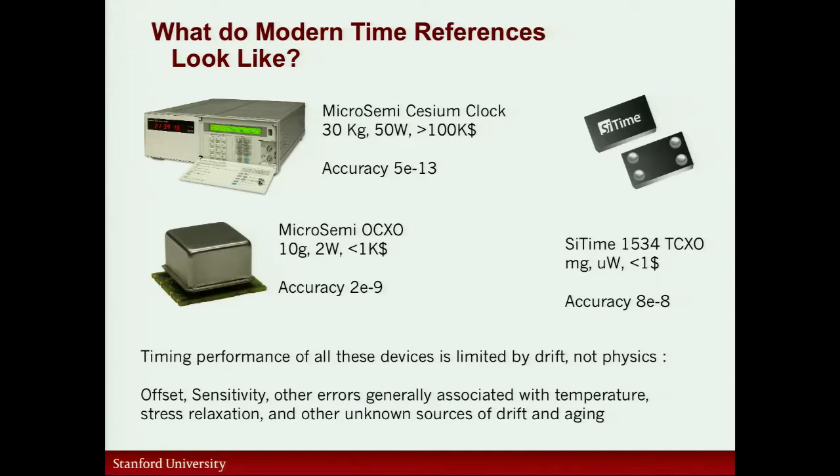And then more recently, silicon micromechanical oscillators have come up, and we'll hear a bit more about that later today. But SiTime has a product that weighs milligrams, consumes microwatts, costs less than $1, and can get down close to 10 minus 7 in terms of long-term stability. And like I say, I'll let them quote the details on that.

Clark wrote a paper about a decade ago that sort of outlines the challenge and the opportunity that is presented here, that there's potential for micromechanical oscillators to perhaps reach stabilities down to the 10 to the minus 9 range and provide low cost, low power, and other opportunities. But aging rates will probably not match those of atomic clocks, just based on what we think is true for MEMS.

At the same time, atomic clocks are too big and too expensive, and unless they come down and become portable and accessible to sort of things that we might carry around with us, there's always going to be this gap between the performance of one and the other, and we really have incredible needs right in between.

So can we improve this? Of course, there's been effort on the chip-scale atomic clock program. The current version of this that I could find on the web is 100 grams, 300 milliwatts, I'm guessing around $1,000, and has long-term stability over temperature that's better than 10 to the minus 9, but not a whole lot better.

And I'll say a little bit later today about what could be an in-chip OCXO technology for MEMS that is approaching some of these parameters, but is a fair bit smaller and could be a lot less expensive. So that'll be sort of the frame for the timing part of this talk.

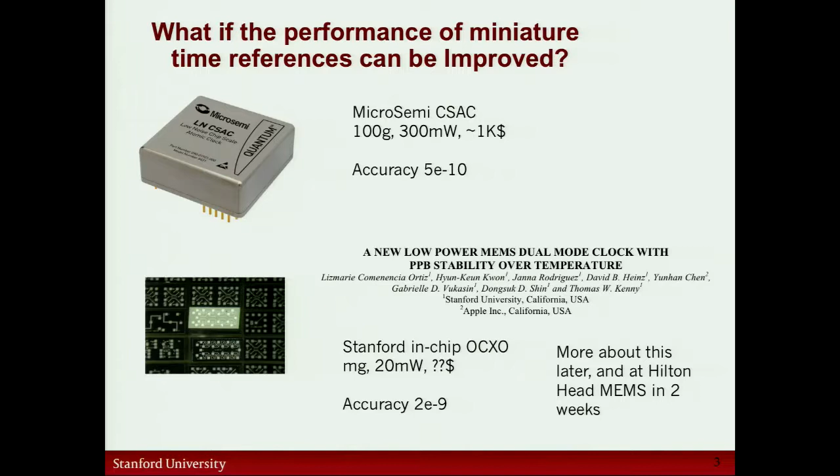And I think true for both timing and for inertial navigation, the issues that limit the low cost, low performance things are not physics. It's not Boltzmann's constant and temperature and things like that. It really comes down to more practical things, packaging, temperature, stress relaxation. And I think what's interesting is that it's the same pile of issues that affect both of these communities. And that's why I think it's interesting to look at the lessons being learned in parallel.

If we could make better inertial sensors and have them still be portable and low cost, it opens up a whole lot of applications that are currently inaccessible. We'd like to do a much better job of personal navigation. There could be better use of these systems in autonomous vehicles and in safety systems. There's a lot of interest in virtual reality, but that also could be much better. This could lead to improvements in surgery.

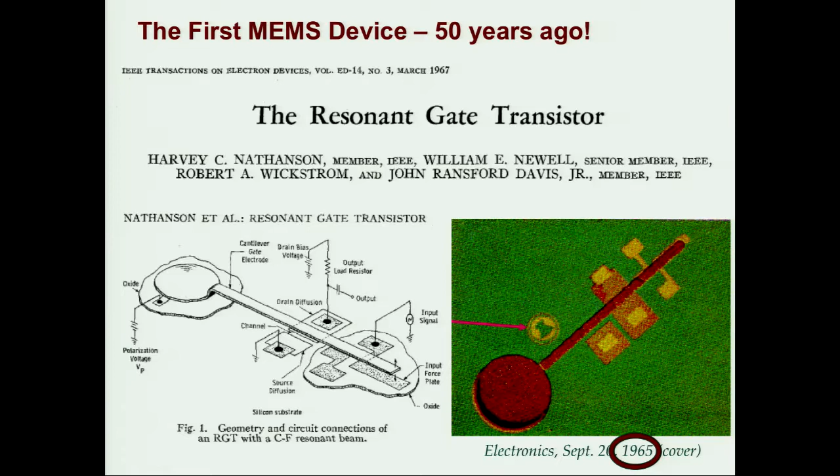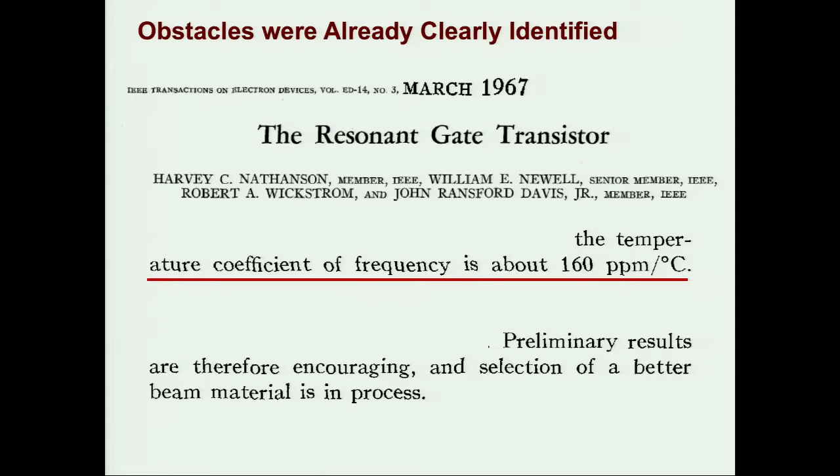The oscillation of the beam in the vertical axis was detectable by looking at the properties of the transistor positioned right underneath it. It had a lot of issues, but it was actually pretty promising in its early stage. Its characteristics over temperature were dominated by the mechanical characteristics of the gold beam, which were terrible. But nevertheless, somewhat encouraging even back then.

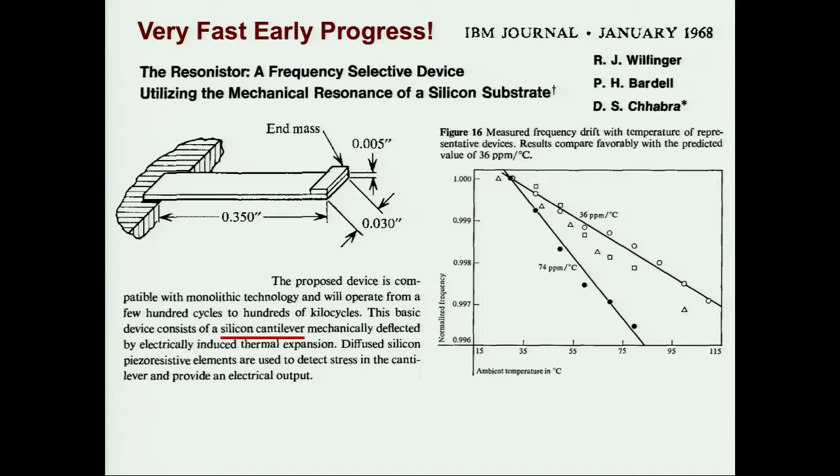Very quickly, there was work on making beams out of silicon. This is now 50 years old. And right away, you could see that the basic performance of the device was significantly improved. The temperature coefficient of the mechanical properties of the silicon was much better than that of the gold. And this was considered a very... which, again, 50 years ago, I think set the stage for what then became a very long, painful development process within our community to try to solve the problems that would fix both what you see here, the strong temperature dependence of frequency, and all of the issues with uncertainty and drift.

This work went on for many, many years in the MEMS community. There were studies by researchers all over the world on micromechanical devices, mostly cantilever beam resonators, exploring things that would affect the resonant frequency of that device. There was interest from the start in detecting single atom or single molecule absorption on these cantilevers as a way of making sensors. And in order for that application to be useful, the resonator had to be stable enough that the frequency shift from a single molecule was detectable above the background drift of the resonant frequency.

So there was a lot of interest in this. People built a lot of devices and turned them on and let them run for a long time. And the general legend in the MEMS community was that, try as we might, there seemed to be some inherent aging problems with the technologies that we were playing with, that the materials were relaxing or creeping. There were other kinds of aging phenomena happening.

And even as we got better at building devices and building packaging, we still consistently had this problem that the resonant frequency of standard micromechanical elements, even when packaged to the best that we could package at that time and protected from the environment, we still saw drift in the dynamic properties on the order of parts per million per month. And of course, anything that's drifting at the level of parts per million per month is pretty much useless in this community. That's a non-starter.

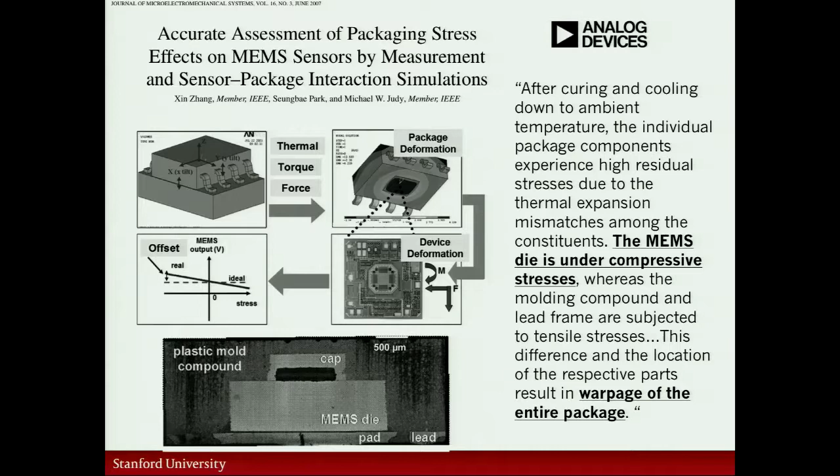And in addition to just stressing the die, they will warp the die, twist it and flex it in ways that are really sort of detrimental to the performance. So they did a lot with simulation in this approach. They played around with the design of the resonator. In this case, it's a gyroscope, but it's basically a resonator. Played around with certain aspects of the material selection. We're able to improve the situation by about a factor of 10 or more.

If you're going to be attached to a warped substrate, your best hope for eliminating that problem is to limit the range of that substrate that you're attached to the smallest possible footprint. And that's a lesson that we've learned for other applications, and I think it's interesting that it shows up as one of the dominant outcomes of this work.

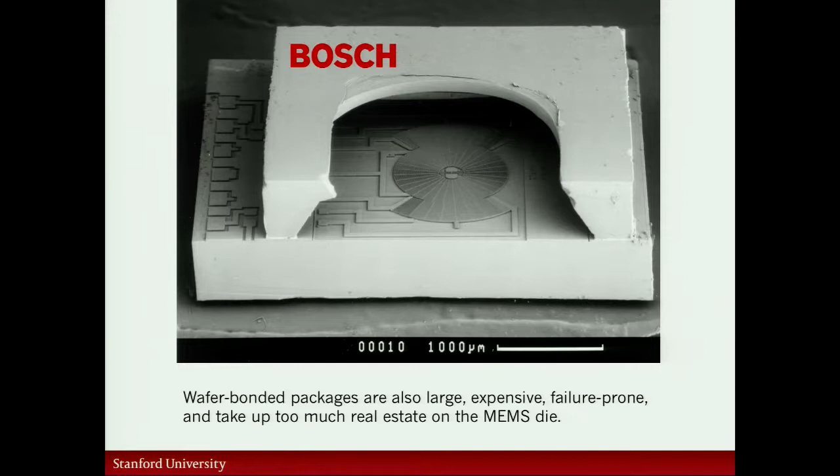But the objective of this wasn't anything beyond just trying to minimize the footprint. Get rid of all of this wasted real estate around the micromechanical element that's important and try to make the entire die smaller. It was really just about putting more die on a wafer, reducing cost, and perhaps improving some of the other reliability issues. This led to some research. Aaron Partridge was a PhD student in the group at the time.

It led to building, instead of bonded wafer encapsulation, we started growing film encapsulation. So instead of putting a second wafer on top of the first wafer, figuring out how to glue them together, we build up the package by growing layers on top of the silicon wafer based on materials that we had access to. Bosch at the time had developed a process for low-stress, thick polysilicon, the so-called Epi-Poly. We had an Epi reactor in the lab at Stanford, which wasn't designed for this purpose, but could be adapted to do this job. And so we started growing packages by building layers on top of the MEMS technology and seeing what we could do with this.

And we knew right away the goal initially was to make accelerometers, make them small, and not otherwise destroy the performance, and we had some good success with that. But we knew right from the start that anything we built had some stability issues. The resonators that we could build in the same process had this drift that I showed earlier, and it had to do with the sealing process.

We're using a chemical vapor deposition oxide to sort of plug up all the holes in the top layer at the last step of the process. When that's finished, that leaves a lot of organic materials bouncing around inside the package. It leaves some organic residue perhaps on the micromechanical elements. That ages over time. It's problematic. But we did have an early victory in that we were able to make a smaller MEMS technology.

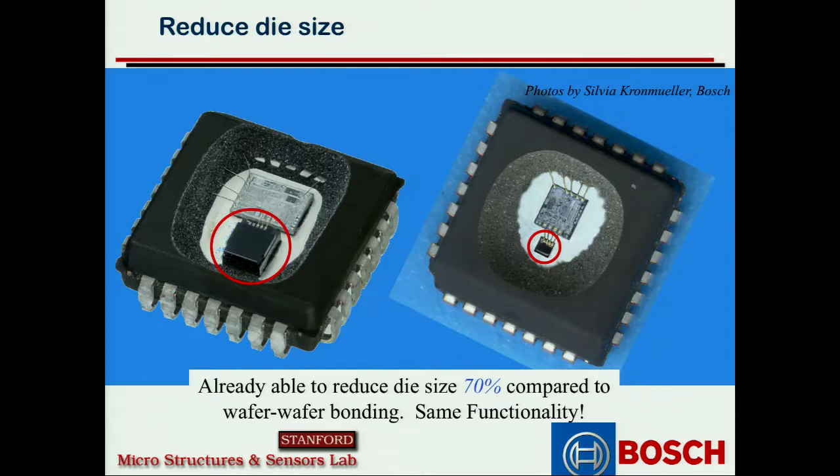Bosch was less interested, sadly. I think, frankly, they had a certain size fab, and they had a certain size customer, and if we put more die on a wafer, it meant less wafers going through the fab, and they'd already paid all the fixed costs of this whole thing, so there was no point in taking this thing on. Plus, it was different and complicated, and they were risk-averse at Bosch.

So we were kind of stuck, looking for what to do with ourselves. Aaron was graduating. Marcus was being told it was time to go back to Germany. We were trying to decide what would be the next step for us. And Clark came out in his time at DARPA with a BAA that actually gave us a new opportunity to rethink what we were doing.

He asked for wafer-level encapsulation strategies, and we had something that sort of looked like that, that could isolate a micromechanical device from the surroundings while maintaining an environment and providing either passive or active control. And the goal of this, way back then, was already thinking about how to make a miniature OCXO, how to develop a technology that could ovenize and isolate a MEMS device from its surroundings.

So we knew right away that our process of sealing these devices with chemical vapor deposition oxide was never going to be good enough for the metrics of that program. So we started looking around, what other things could we use to seal the device with, still preserving this thick film encapsulation process and most of the materials. And by the way, also, wanting to be sure that whatever process we developed would be compatible with established manufacturing processes at Bosch.

We didn't want to invent something that was cool and useless. So the goal was to try to develop something that actually, if we got something right and it was interesting, there's people who would know how to make more of it, and we could go down a faster channel.

So among the things you could deposit, we thought about depositing metals, we thought about depositing other materials, ultra-high vacuum techniques. We already had this Epi-Poly thing that we were using to grow the first half of the cap, so it was kind of obvious to try that as well. We could just seal up the part by growing more Epi-Poly. And so let me just take you through how this sequence works as an example.

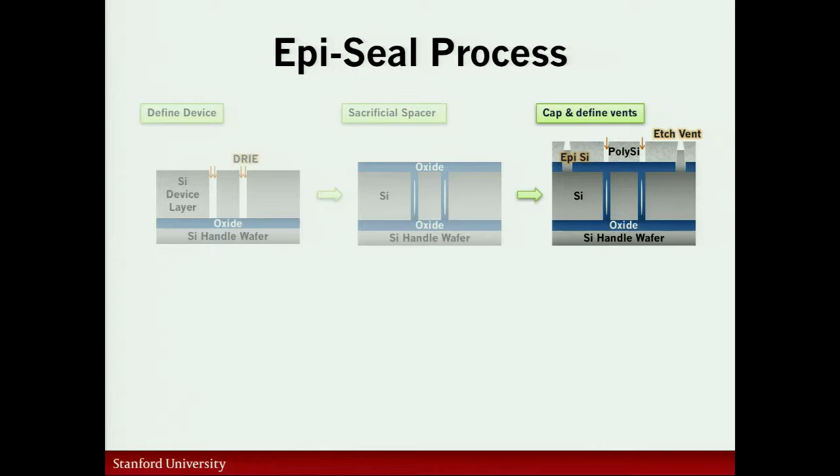We then grow the first thin portion of what becomes the package. This might be 5 to 10 microns of polysilicon using this Epi-Poly process. We do some patterning of this to create access points for the electrical contacts. But otherwise, it's just polysilicon. We use an HF vapor etch to go down through the small holes in the poly and etch out the oxide that surrounds the micromechanical element.

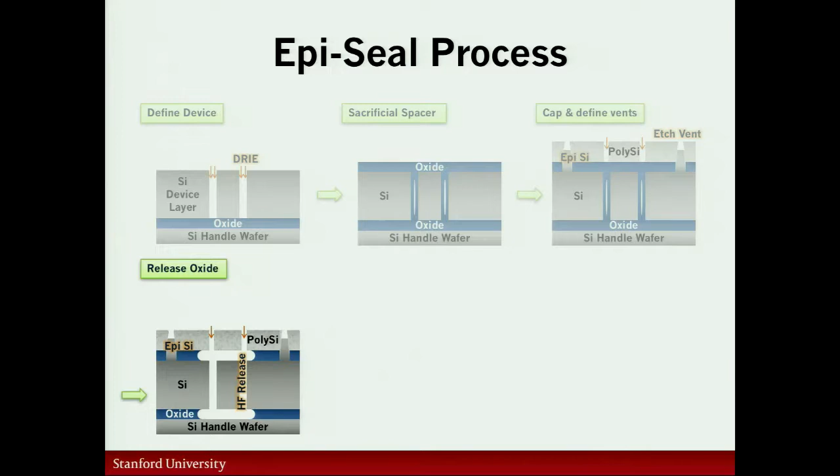The nice thing about the HF vapor is it tends not to leave any condensation behind, so we don't have problems with capillary forces and stiction. And it's otherwise pretty clean. It leaves behind a hydrogen-terminated silicon surface, which is pretty cool.

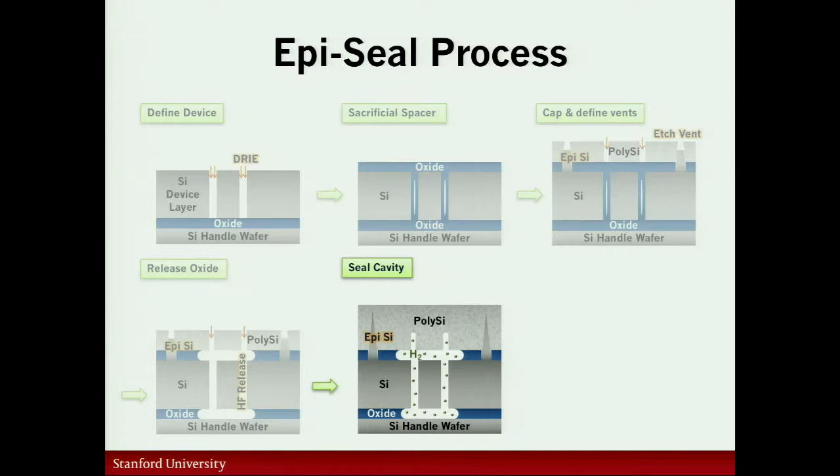And then we go right back into the Epi reactor pretty much as quickly as we can and grow up another 10 to 20 microns of polysilicon that seals up the vents that we used for releasing the MEMS device and seals everything so that what's trapped inside is just leftover hydrogen gas and otherwise a sealed micromechanical element buried inside the wafer. We do some last steps that help us establish the electrical contacts from the surface down to the MEMS layer and do some things.

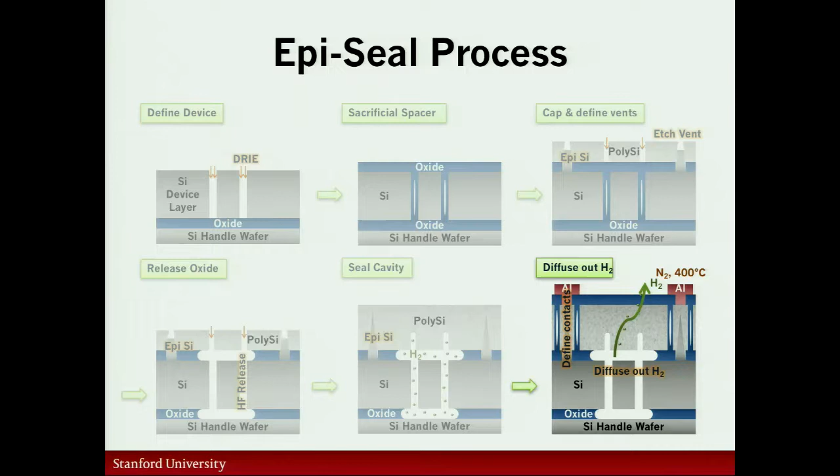We can heat the wafer in a nitrogen furnace, and that drives out the residual hydrogen, so we can reduce the pressure that's trapped within the resonator, get down to pressures that will give us higher Q.

The resulting technology has a lot of properties that we wanted, in that there was low pressure and a pretty clean environment. We thought that would give us a better shot at a stable resonator. It did some things that we didn't understand at the time, but have turned out to be really important.

The sealing step takes place at 1100 degrees C and takes a half hour to an hour. So there's a very high temperature bakeout of the MEMS device during that process. It's unlike any bakeout ever seen anywhere else in the MEMS community. A lot of really good things happen when you cook something at 1100 degrees C for an hour in terms of killing the chemistry.

One thing in particular, if you have hydrogen gas in an environment at that temperature and exposed silicon sidewalls, the hydrogen promotes a smoothing process that takes away what was originally the scalloped sidewalls of the etch process and replaces that with something that's almost atomically smooth. What's important there is that later on, there's no roughness or sort of unpleasant surfaces that are going to relax and age over time. The surfaces of this micromechanical element are basically in their ground state, and there won't be any further evolution in the structure. That leads to some of the really important benefits for aging.

There's no native oxide here. There's no oxygen, because in that high temperature seal, basically the silicon acts like a getter for anything like oxygen during the sealing process. And all that's left over is a low pressure of inert hydrogen, which is basically an ideal gas. It doesn't stick to anything, it doesn't react with anything. If there's a little bit of it bouncing around, that's perfectly fine. It's not going to do anything that would change the properties of the device.

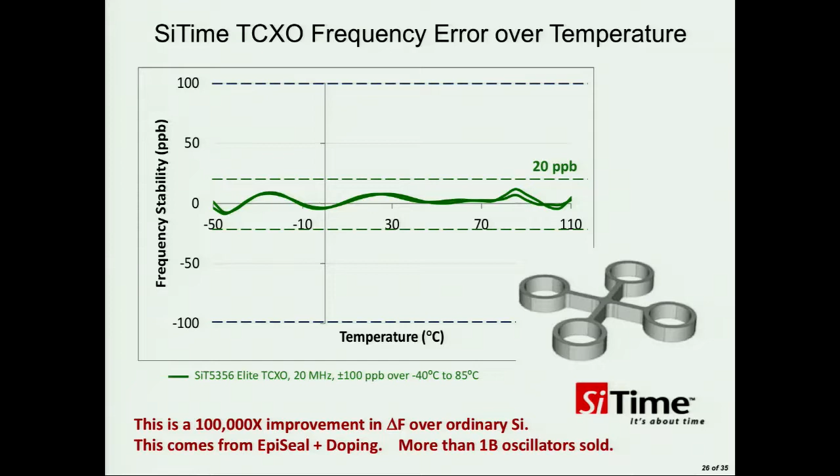The technology there is a micromechanical resonator encapsulated in a process like what I've described, which can be temperature compensated because all the other drift is under control. And we're talking about levels of accuracy over temperature in the tens of parts per billion for simple TCXO technology. So it's a MEMS device, a circuit that measures temperature and corrects for the temperature coefficients of everything that's modelable and repeatable. And you'll hear more about that this afternoon from Sasan.

So I don't want to dwell too much on the SiTime side of this. So we learned a lot. I think we learned how to make a micromechanical thing that could be packaged in a way that's compatible with volume manufacturing. We learned how to make it such that its mechanical and dynamic properties were very stable over time. And then the question is, can any of this apply to making inertial sensors? And so this is what we've really been working on for a lot of the last decade.

And there's really two ways to make, or to talk about making better inertial sensors. You can start off with really cool ideas about how to make a device that'll sense an inertial phenomena in a new way. And that's very common in the inertial sensor community, in the MEMS community. You come up with the way to make that thing and demonstrate the first functional performance of that. And you get some signals, you show a scope trace or some other thing. And right away you notice that it's pretty good, but there's some issues with drift.

And then you spend the rest of your life trying to solve those drift problems by changing design, changing package, changing circuits, compensating. And that's basically representative of the technology that's in your pockets, all the inertial sensor technology. The idea for how to measure the signal came before any of the other stuff. You've got a horse and a cart, and I think, frankly, they're in the wrong order here. I'd say you should start with a manufacturing process that you know solves the hardest problems you're going to face at the end, which is going to be the drift and the offsets.

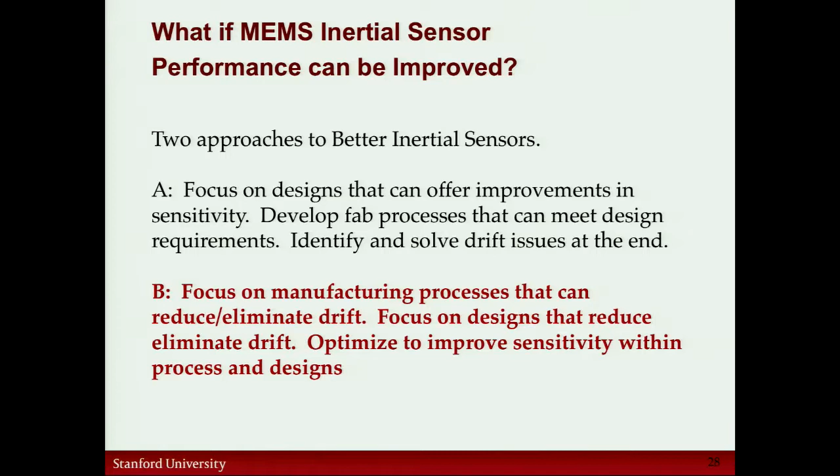Focus on designs that reduce those effects as much as possible. And then, after you've got a stable thing that you know works and that you can manufacture, then go try to figure out how to make it more sensitive. Change the designs, change some levers, change some things that'll give you better sensitivity. And that's kind of the style we've been looking at this.

So the things we've learned from the resonator work that inspire our work on inertial sensors are very simple. Use the resonator as a sensor. Don't make piezoresistors or other weird material stacks. Stick with the resonator, because we know we can make that stable. Your signal is now a change in frequency. Figure out ways to make that a differential frequency or other things, but start with that.

Use crystalline silicon. It's easy to make things out of poly, and they're pretty good, but there's just a lot of stuff that goes on with poly that you're never going to fix. Design within this process, this Epi-Seal process that we developed, because we know it gives you a stable result. This process has constraints. It doesn't let you have arbitrarily large gaps or arbitrarily large structures or weird materials. There's no way to put a piezoelectric material into this. Live with that.

And then focus on designs that are going to improve your immunity to package stress. And really simply here, this means don't have a whole bunch of anchors spread out all over the die so that when the die warps during your final assembly, that's going to stretch your mechanical part all over the place. Single anchors as much as possible. And then our goal was, if we found something that worked pretty well, we could transition to volume manufacturing.

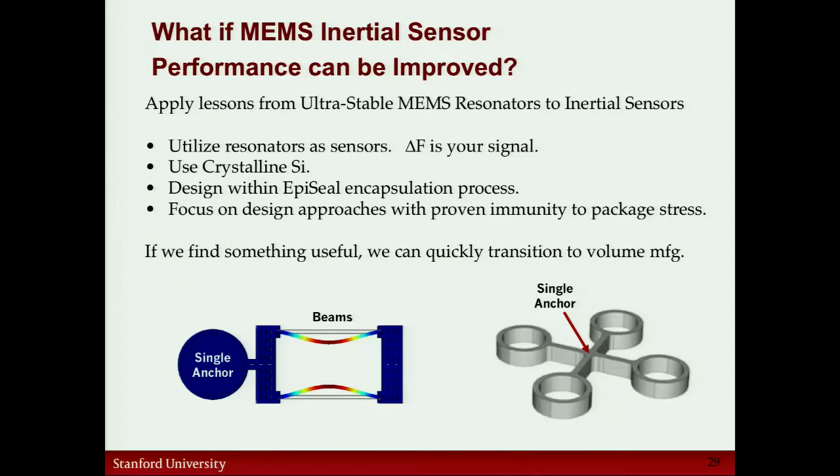So the first question really is, can you build inertial sensors in this process? The constraints of Epi-Seal are not ideal. There's a limitation on the gap widths. You don't have a lot of materials. You generally have low pressure. And we don't know what happens if the mechanical element touches the adjacent surface.

The MEMS community is plagued by stiction, which is how actually the inertial sensors in your pocket will fail someday. The mechanical element's moving around. If you drop the phone, it touches the sidewall, it might stick, and that's dead. In our case, we have atomically smooth surfaces of single crystal silicon that might come into contact. You'd think that would be a horrifying opportunity for stiction to happen. It turns out it's actually not so bad. We've looked at this a lot.

We've built a lot of test structures, as many as 1,800 parts over a bunch of different runs, different geometries, different students running the process, so the actual parameters are not well controlled. We find a very consistent level of stiction force, which looks like van der Waals and not chemistry. So two things come close together. There are physical forces from van der Waals that will bind them together. There's a finite size. If you exert a force big enough to overcome that, they'll come back apart.

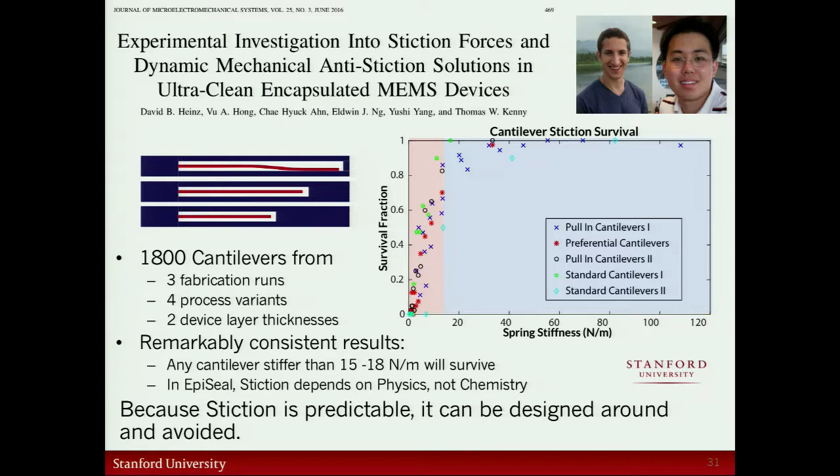And again, this is one of these things where if you have a choice between a problem that depends on chemistry or physics, take the physics. The nice thing about van der Waals force and adhesion is we know exactly how big this force is going to be, and that's just a design problem. We can build inertial sensors that have enough restoring force to overcome this adhesion, which is lovely. So this is what we've been doing.

And then since then, we've made some modifications to our process because we need better resonators than the basic SiTime process can produce. In particular, we'd like to have things such as Lame mode resonators or bulk extensional modes because they have higher Q and higher frequency and generally better properties for making the kinds of things we want to make. So Eldwin and Yushi worked hard on a thing where we start the process very much like Epi-Seal, except the first thing we do is we etch some vents through the SOI layer, and then we grow Epi up on top of that to build our device layer after having formed a chamber underneath the resonant structure that we're going to release later.

It allows us to release large areas of single crystal silicon without having to put vent holes through the silicon structure. The absence of those vent holes means there's a greatly suppressed thermoelastic dissipation effect, and the Qs can be much higher, and there's a lot of other benefits that we get from this.

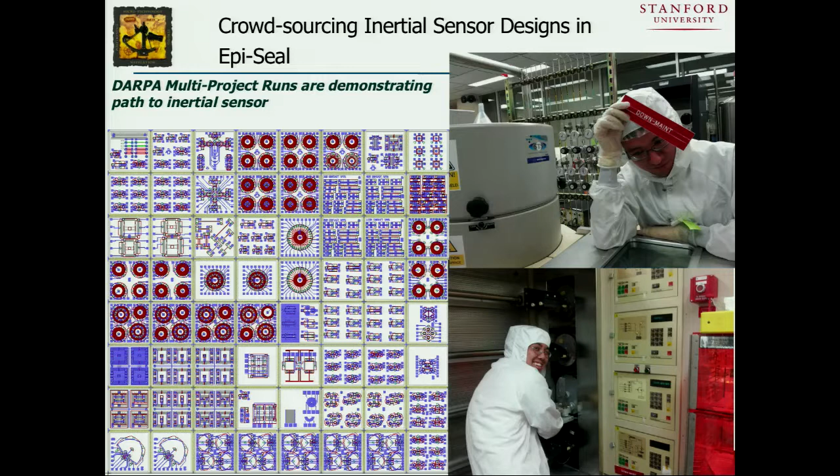And then since then, we've kind of been crowdsourcing the inertial sensor part of this thing. Our DARPA sponsors more or less said that we'd run our course on the Epi-Seal research side of this thing. There wasn't that much going on that looked interesting to them. If we let some other designers come into the run, they would continue to fund it. My students were a little upset at the prospect of having a random, unwashed horde of external designers contributing designs that might not work or might be problematic, but we overcame the issues of that, and we're currently doing this thing where every year we get designs from basically all the other participants in the DARPA funding community that we're attached to, and we allocate space in our fab runs to putting their devices in.

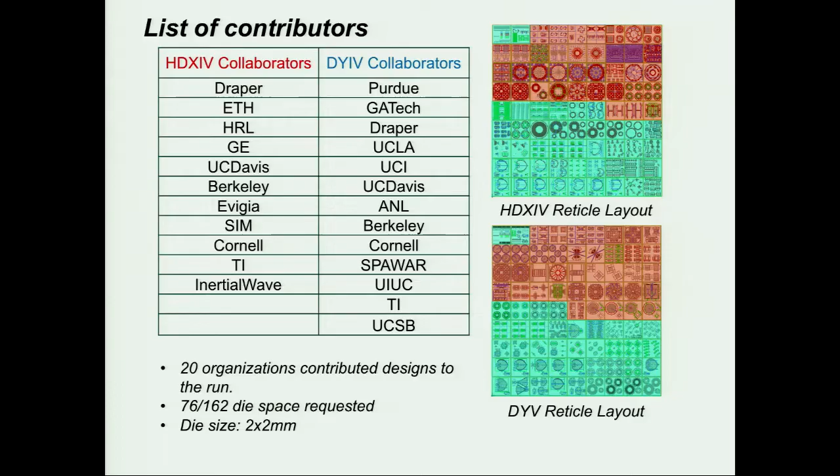All we really do is try to verify their parts are likely to work, more or less as they intend, and that if something goes wrong, at least their device won't wreck the whole wafer. So short of that, it's basically you throw your designs in and we build the parts. At the end of the run, we chop the wafer up and you get your stuff, we get our stuff, and we get to keep doing what we've been doing, but there's a larger community. And it's led to a lot of pretty interesting results. We've formed collaborations that might otherwise not have naturally happened.

Here, working Stanford and Berkeley, bitter rivals in many ways, but happily collaborating because my friends Bernhard Boser and Dave Horsley were thrilled that they could get free parts from us that had properties they probably couldn't build on their own. So they've been building various kinds of gyroscopes that operate in interesting ways and overcome certain operational problems with MEMS performance. Our friend Farrokh Ayazi at Georgia Tech, another friend but not necessarily a likely collaborator at Stanford, is participating in these runs, and we're sharing devices and getting things done together.

We've worked with folks from Draper Labs on some technology that actually led to some of their DARPA funding. Our successes demonstrated in our process improved that. Their interest was in making something out of silicon carbide, but they put the same designs in our fab run. Our parts worked faster and more readily and gave them the results they needed. We've been working with Analog Devices on some ideas about inertial sensors, particularly gyroscopes, and how the mode of operation affects the performance. In our own group and in collaboration with Bosch, we've been showing we can build multiple kinds of sensors in the same wafer side by side.

What's interesting about this is that if you have a temperature sensor and a pressure sensor and an inertial sensor all in the same chip, they all measure everything all the time, right? Every sensor is a thermometer. Every sensor is a pressure sensor. Every sensor is an accelerometer. And all of their cross signals actually help you calibrate the entire device and compensate for effects that might pollute a single axis device. We've been able to make magnetometers, again, lots of physics here, Lorentz forces and displacements producing a resonant signal.

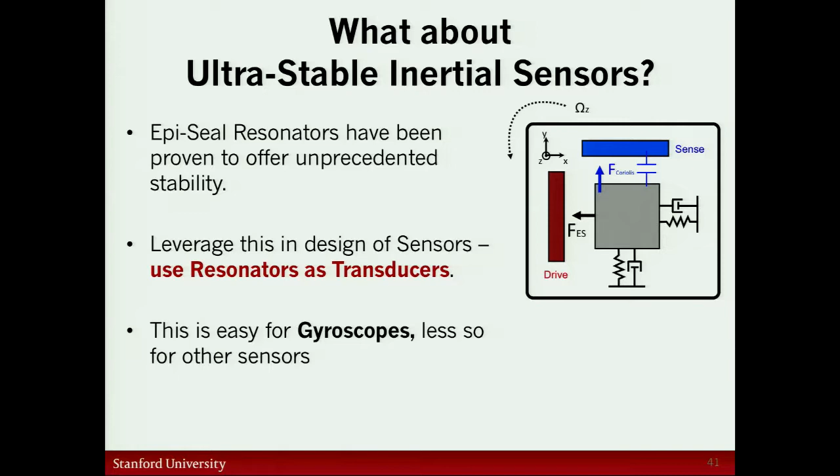This is collaboration ongoing with Dave Horsley's group. So what about making inertial sensors, right? What about making really good ones? We've been, in our group at least, focusing on certain aspects of this that we think we've learned some lessons.

So we want to make an accelerometer. We want it to be a resonant accelerometer. I don't want strain gauges or differential capacitance. I want a resonator. There's a history of resonant accelerometers out there in this community. They're largely devices where you have some proof mass attached to some tuning fork sort of strain gauge sensors, and as the mass is deflected left and right, there's differential axial tension on the resonators, tension or compression, which causes the frequencies to move up and down. You can measure the differential frequency and pull the signal out.

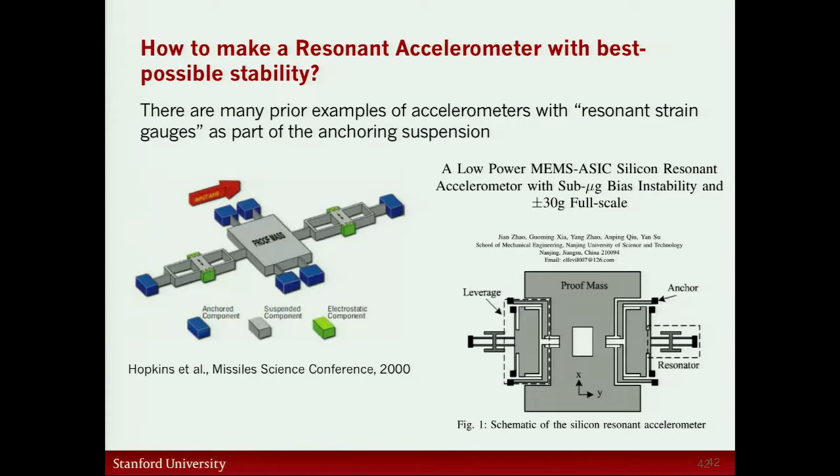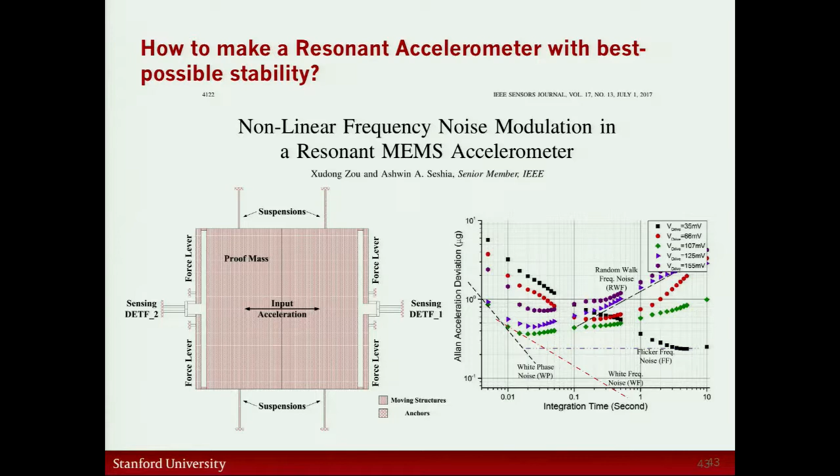There are ideas both from a lot of people around the world and more locally for sort of building mechanical levers around the micromechanical element. This is Ashwin Seshia's group, to try to amplify the strain signal, to try to make a larger delta F per unit acceleration. And there's a lot of good things happening here.

But I think from my standpoint, the lesson is that all of these architectures violate one of our design rules, which is that they build a set of anchors that are kind of distributed far away from the center of the die. And they provide an access point for any of this external stress to get into the sensor and cause frequency shifts that are not from your inertial source. So we've been looking at how do we build accelerometers that have a single anchor and are resonators. So this is work under the DARPA program we've had the last couple of years.

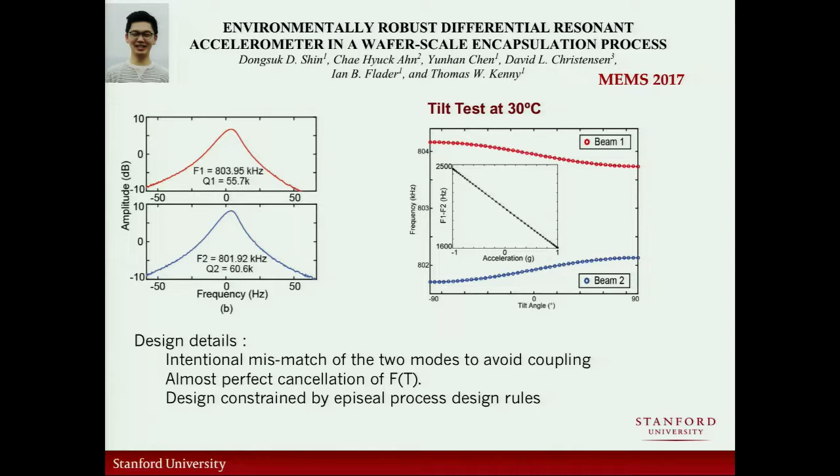Single anchor, micromechanical sensor. You have two resonators. They each have a differential response to acceleration and presumably a common response to temperature. And they're both as immune as possible to external stresses because the entire thing is connected only at a single point. We do mismatch these resonant frequencies intentionally because if they cross, the two resonators can couple to each other, and there could be a range where you just have a single coupled mode instead of a true differential. Because the resonators are slightly different frequencies, they do have very, very slightly different temperature coefficients, and that ends up being the residual temperature effect that we see.

But this device in our lab gets down into the sub-micro-G range. And at this point, the measurements we're doing are mostly dominated by environmental vibration and the temperature effects of the lab on the external circuit, not so much on the fundamental physics. This device ought to be another factor of 10 lower if we're just talking about its thermal noise. But the nice thing here is we're in a technology. It's compatible with everything I told you about, and it's something that could go into manufacturing based on a resonant sensing of the acceleration.

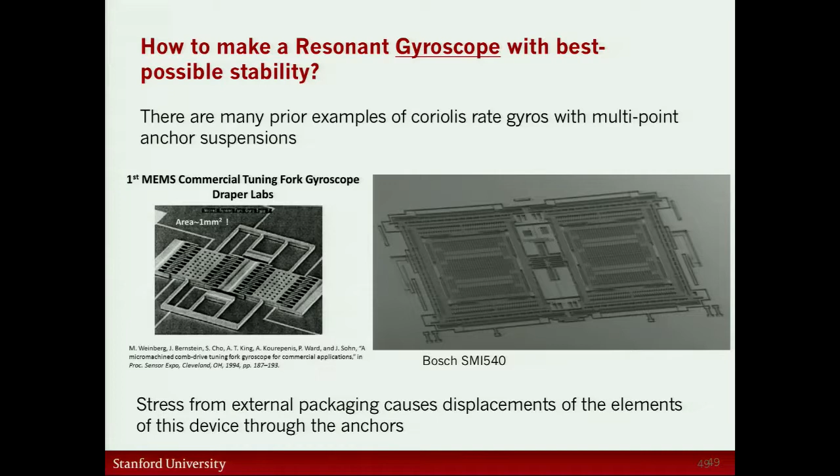What about gyroscopes? The MEMS community has been making gyroscopes for almost 20 years, inspired by some automotive safety problems, and now filling up your pockets with gyroscopes that you probably have never used. Lots of different architectures, but quite generally you have the same thing where you've got a pair of masses moving in some differential motion. As a rotation signal happens, the Coriolis force couples to a differential out-of-plane motion or a differential in-plane motion depending on the vectors.

And all of this is a contraption of micromechanical masses and springs suspended by anchor points around the perimeter. So when you take this die and you glue it down and you warp it and seal it in package, all of that is going to twist and stretch, and this whole thing is now going to sense all of that as well as the inertial forces.

You can do pretty well. But there actually is a pretty compelling available architecture for a gyroscope that doesn't have that problem of multiple perimeter anchors. A thing invented at Boeing about a decade ago by Dorian Challoner. It's a wine glass gyroscope. So it's a flat disk of silicon with a lot of slots in it. And you drive it in plane in a mode that looks like the wine glass vibrational mode, sort of like

this. And if there's a rotation around the vertical axis, Coriolis force couples the energy of that vibration into an orthogonal mode that's 45 degrees away, also in plane. And the whole thing has a single anchor right at the center. It's all in plane drive and sense. Could be made out of single crystal. It fits exactly into our process, and we've been having a lot of fun building these things.

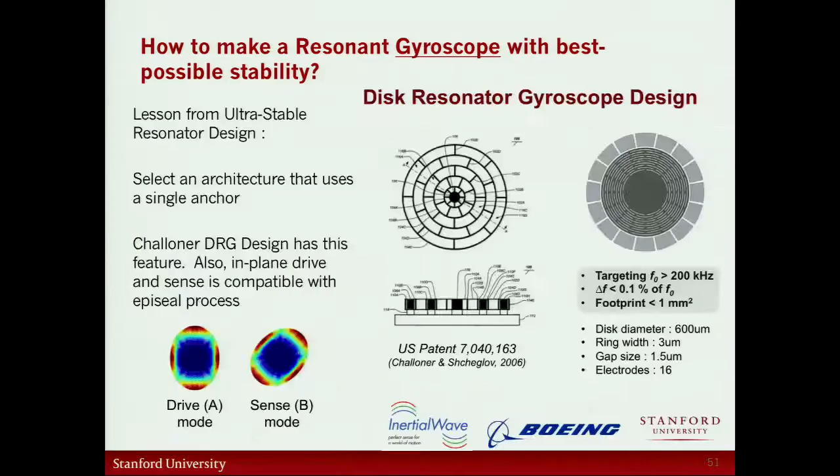I think we may well have built 10,000 of these gyroscopes in my lab over the last decade. And depending on how you operate them and everything, we're now seeing rate performance down close to 1 degree per hour. And to my knowledge, this is the lowest MEMS gyro drift rate that I've seen. It exceeds anything you can buy from the companies. It exceeds all of the research that I showed you from my friends back here. Let's go back to Dave Horsley and Bernard Boser.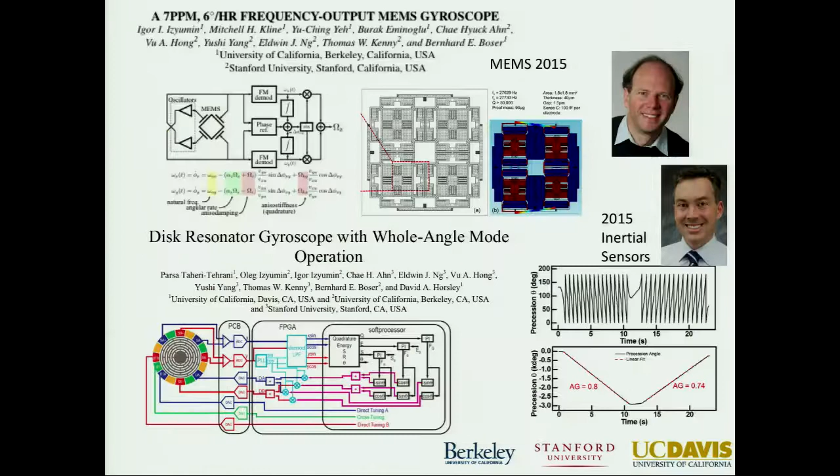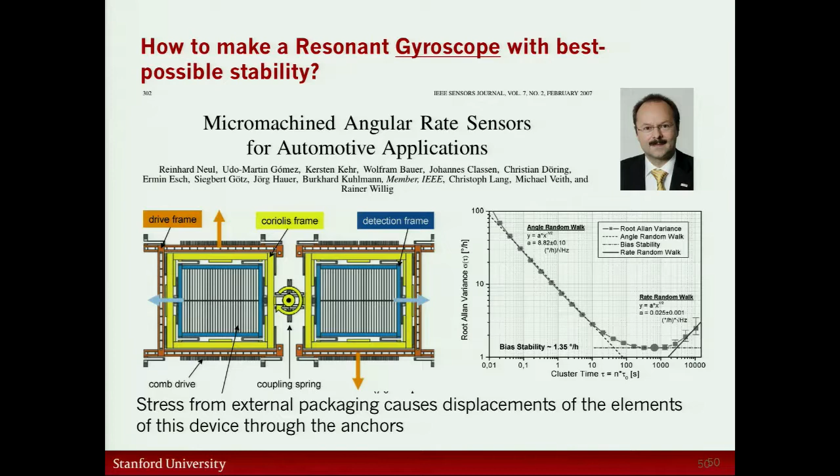Let's see, Allan deviation. So here's Farouk's Allan deviation is maybe 0.05 degrees per second. This looks good until you look at the units on the vertical scale. The Allan deviations here go down to a few degrees per hour. The commercial parts from Bosch are also kind of in this range. Let's see, this guy gets down to about 1.35 degrees per hour. And much less effort, much less engineering, very simple central anchored device is among the best of class in this category. And lots of room for improvement here.

So I think this is really kind of the story for the MEMS community. We built a lot of stuff over a lot of years that's all very cool. And it's plagued by offset and drift problems, I think largely because we built stuff with too many perimeter anchors. We've built things in processes that are inherently full of drift. And we ought to stop doing that. All right. So I got a little time left. So back to the resonators. So things we learned for sure that matter.

Silicon's a great material. You can build it in Epi-Seal, has smooth sidewalls, it doesn't drift. Life is wonderful. Temperature dependence of the dynamic properties of silicon, the elastic constants are just terrible. 4,500 parts per million over the room temperature operating range of a commercial product. Quartz is maybe 50 to 100 times better. And this has always been the number one reason quartz was the preferred technology all along. And even as SiTime was getting going, we all knew this was the barrier we had to climb.

We could make stable silicon. We could do all the temperature compensation in the world, but we started out a factor of 50x behind quartz. And the time and money and effort you spend to overcome that factor of 50 is a real problem. Even if you have all this silicon manufacturing technology, wafer scale packaging, yada, yada, it's all great. SiTime spent a lot of years making parts that no one wanted to buy. We loved ourselves, but it was kind of a waste of time.

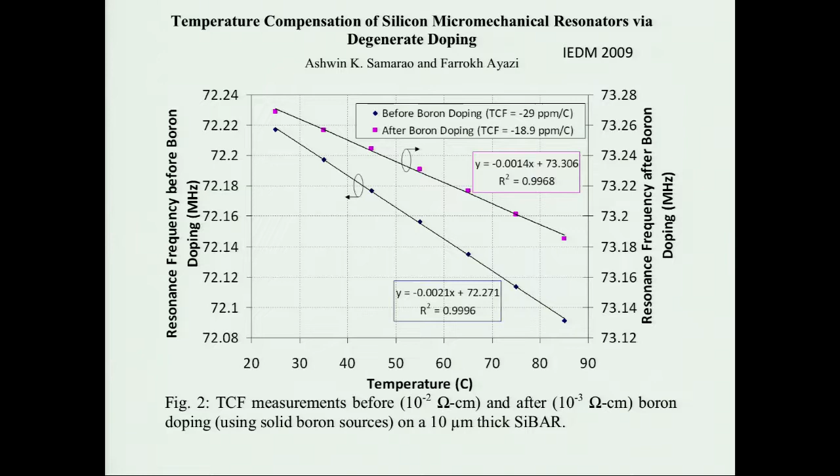The thing that changed, which actually opened this up and made it interesting and useful, was that there was a discovery that if you put enough doping into the silicon, you actually start to modify the temperature dependence of the elastic constants. In our community, this first showed up through some work from Ayazi's group. But really, we were lazy. We should have been reading the literature. There was stuff 50 years ago that said doped silicon had different temperature dependence of its elastic constants than undoped silicon. In fact, less temperature dependence was accessible.

We should have known this. We all should have known this 40 years ago. And that's kind of embarrassing that we didn't. But since then, in the last decade, we've worked really hard to understand how to put this to use. Groups at VTT and at Stanford have done a lot of work measuring the temperature dependence of the elastic constants for different amounts of doping. We found resonator designs and combinations with orientation and doping that have much, much lower temperature dependence. And frankly, bring us to the place where the temperature dependence of the MEMS is comparable with the best quartz.

So we've overcome that factor of 50 disadvantage. Now the other things actually become useful: low cost, manufacturing, perhaps better drift. And what we've been focused on in the last few years is what about making an OCXO out of this? So the MEMS community has been talking about OCXOs a long time. This is some stuff in Clark's thesis more than 20 years ago.

Polysilicon MEMS resonator, suspended on a little silicon island by some tethers that brought the electrical signals, the thermal isolation, and the mechanical support. And he had a thermistor on the suspended element. He could measure the temperature of that. He could apply different amounts of heat to the suspended element to try to regulate temperature in a fixed range and overcome the dominant sort of 30 ppm per degree C temperature coefficient of the silicon, and did quite well.

There's two things here that I think I would like to see done differently. One of them is that if you make a thermistor for your temperature sensor in an OCXO, it introduces heat in one place somewhere in your system. It causes temperature gradients. It actually causes errors. You don't really want a temperature sensor that is also a heat source. It's kind of, you're fighting yourself.

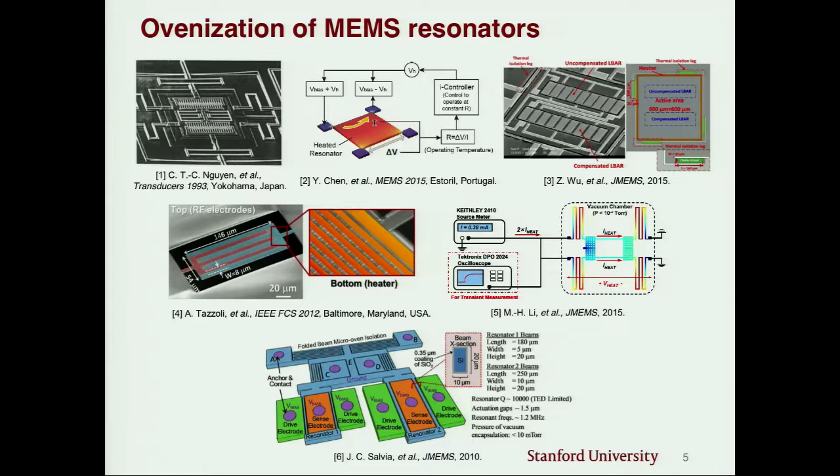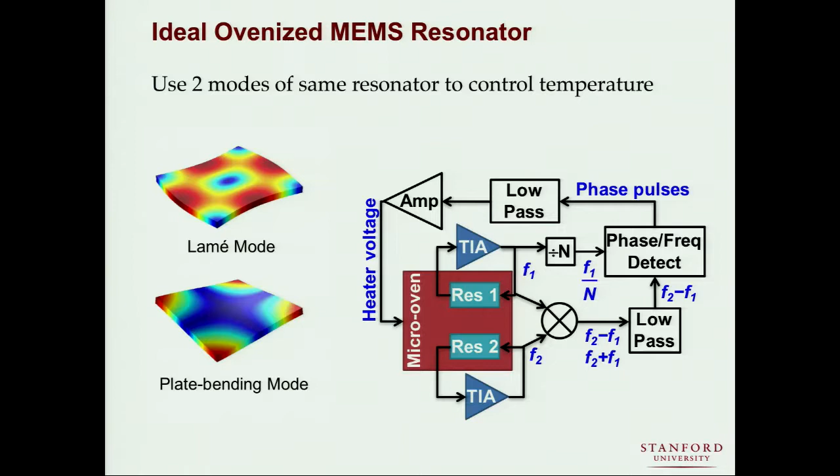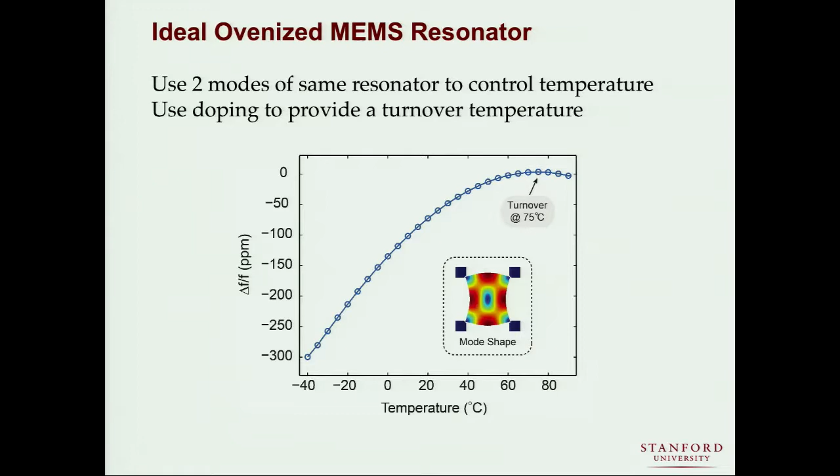And I'd say the ideal resonator ought to have these properties. You don't want to use a thermistor. You want to use two modes of the same piece of silicon to measure temperature. One mode has a high temperature coefficient, one mode has a low temperature coefficient. You implement a loop around some relationship between those modes. You want to use this doping technique I mentioned to give you a nice flat spot somewhere on the temperature dependence of the dominant mode of your system and operate at that point. So you correct first order all of the temperature effects.

You want to support the whole thing with a single anchor. Don't build a web. Have a single point. You want to pick a good mode. You'd like a high Q, high frequency mode that doesn't have a lot of temperature dependence to its dynamic properties. So we can fix the temperature coefficient of frequency with doping. Temperature coefficient of quality factor is another issue here. And if you're limited by thermoelastic dissipation, you've got a pretty strong TCQ, which is annoying.

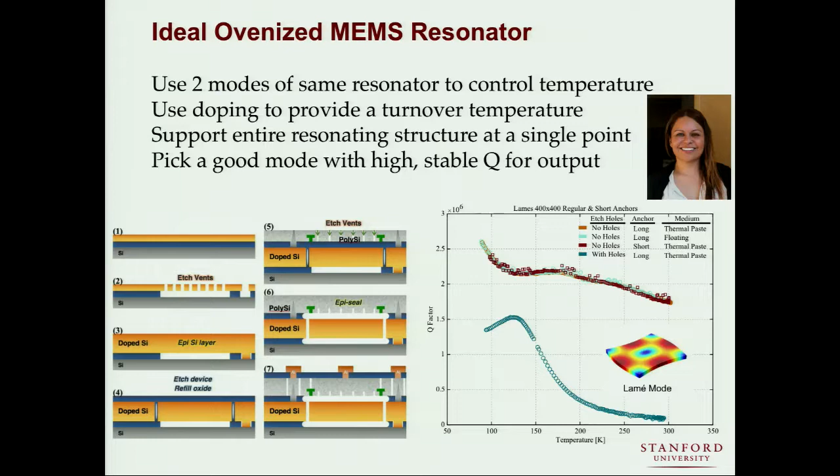We found that if you build parts that are bulk mode resonators with no vent holes, you get into the limit that seems to be Akhiezer damping limited. And it looks like the temperature dependence of the Akhiezer damping is much smaller. So you have a system that's more easily operated over a wide temperature range. You try to, again, as I said, suspend the absolute minimum stuff. Don't suspend the whole chip or a whole container, just the vibrating piece, nothing else if you can. Some of this dates back to some work we did with a different architecture some years ago.

So here's what the current versions of this have looked like. We had a project just a couple of years ago where we made one of these Lamé mode resonators. We suspend the resonator from a single point, sort of a stub coming down from the cap. We put heat into the cap that would heat locally a region of the cap and anything attached to it. So the resonator would be suspended from that, pretty isothermal. It has two vibrational modes. One is this Lamé mode that has all the right properties. And then there's another sort of plate bending mode, looks like a Pringles potato chip.

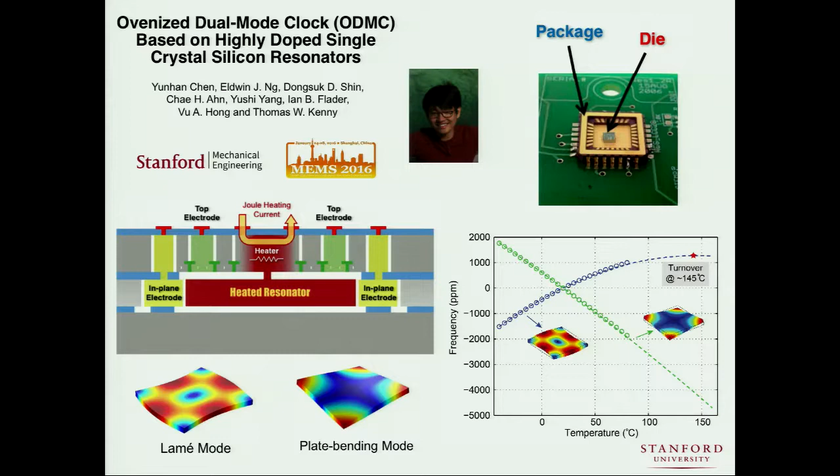And it has a higher temperature coefficient of frequency, and we can access these two at the same time and operate a system around that. We found from some effort that we could get to something around 200 parts per billion over temperature with this device. It took about 100 milliwatts of heat because we're dumping the heat into the cap, and there's a lot of thermal contact that allows that heat to spread. That creates a huge temperature gradient in the cap, which pushes a lot of the electrodes and contacts around and causes other problems. And what we really learned coming out of this is we got to move the heater down into the device layer. If we cap heat or die heat, we're causing all kinds of problems that are just in the way.

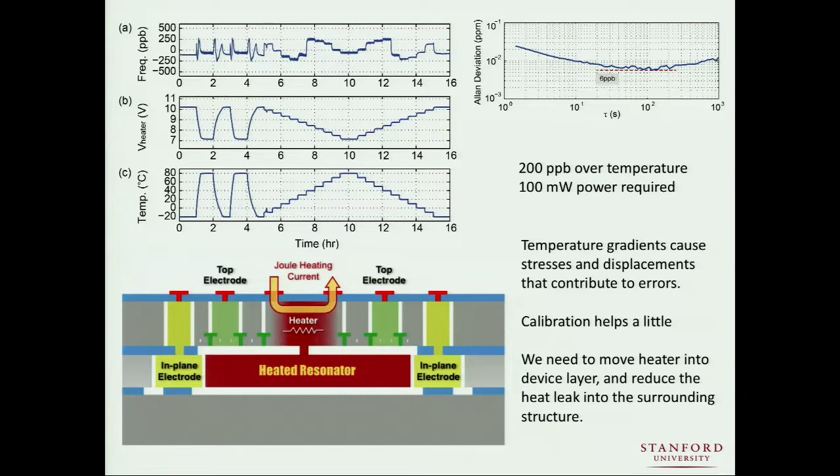So the last couple of years, and Lizmarie is sitting here, we've been looking at the optimal design of these in-plane suspensions. So we have a pair of anchors and sort of a slab of material that hangs off the side from those anchors. We've built folded suspensions that provide both thermal isolation and a place where we can build the heater.

And then the tuning fork element hanging off to the right side is isothermal, and it's connected only at that one point. And we've been looking at changes in the size and shape of the suspension to try to optimize the contrast between stiffness and thermal isolation. And now to make the clock, we build the same technology, but we hang a frame off of this single point anchor and suspend a Lamé mode resonator in the middle of the frame.

So its contact with the outside world is through a frame, through a suspension, to the die at a couple of points off to the side that are fairly close together. And again, we have these two modes, the Lamé mode and the torsional mode, that have the same operation. With the right doping, this Lamé mode has a flat spot at around 80 degrees C, so we can ovenize at that point. And the nice thing here, since we're suspending the minimum amount of stuff, it's pretty robust.

We can have low power. It takes about 20 to 30 milliwatts to heat this thing, and it'll survive 6,000 Gs of shock without breaking. How many OCXOs in the room can survive 6,000 Gs? I don't see any hands. This can, and it's because we're only ovenizing a few cubic microns of stuff instead of millimeters or centimeters, and that helps a lot. So this is how the performance of this device looks.

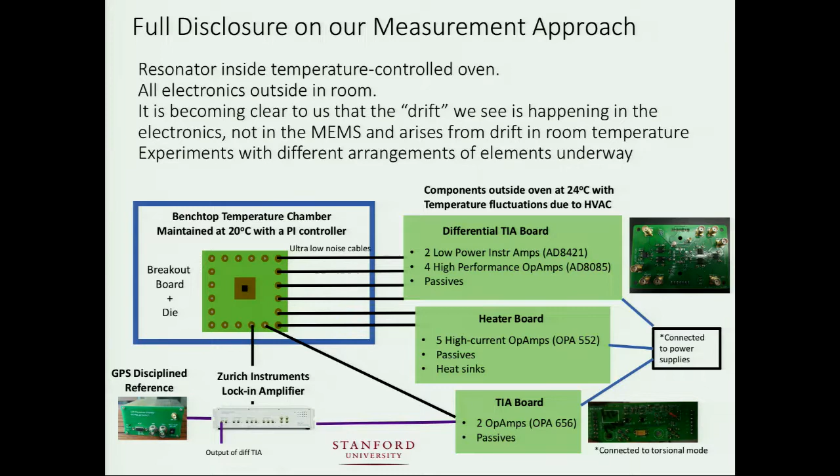So a little bit of full disclosure on this thing. The resonator and a printed circuit board live in the oven, and everything else is outside. The oven temperature is going up and down, but everything else is only experiencing the lab temperature. And we got a lot of good data back in February and March when Stanford was in a crossover season and the lab was pretty good. More recently, springtime at Stanford, it's warm in the daytime and cool at night.

So a lot of that's fresh off the press, and I'm happy to share that with you and answer questions about it. The main conclusions are we've learned a lot about making MEMS devices in this high-temperature encapsulated process. Most importantly, we learned that silicon is great, really great, doesn't drift. If you solve the external problems, you can actually make wonderful things. This helps us build great resonators and, I think, better inertial sensors.

And I think what this is now leading back to is a possibility of building a really impressive MEMS OCXO, where you ovenize the minimum stuff, you leverage all the things we've learned about geometry and design and packaging, you build a great circuit, not printed circuit board stuff like the stuff we have outside in our lab. Obviously not optimal, but that's what we do as we get started. And I think there's an opportunity to really push the needle past where Clark thought it might end at a parts per billion, even perhaps into the domain currently ascribed to the atomic clock regime.

So with that, I'll stop. Obviously, everyone else does all the real work, and there's a lot of history all the way back to Aaron Partridge on this project, and I'll stop there. Thank you very much.

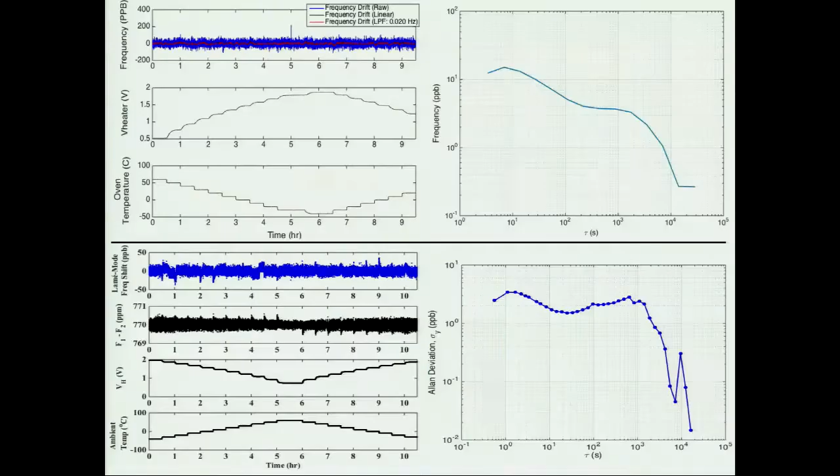Okay, so I routinely fly oscillators that survive 6,000 G's of shock. We'd never get to space without them. But cool. I do have a question about the dual mode sensing for temperature compensation. So I'm pretty familiar with that technique. One of the things that was discovered in that approach in quartz, of course, was the dual mode idea looked really clever and worked well. But we found that over time, the differential aging between the modes would move the cancellation point.

And I was wondering whether you all had looked at that same problem, or perhaps because of the temperature extreme by which you do the processing, that's your major advantage. Yeah. But I was wondering if you looked at that. Obviously work in progress.

Things we've seen, so we've built a lot of devices where we have two different resonators in the same die, and we've just run them in parallel for months and years. There's no differential drift that we've ever been able to see. Okay. Those were similar devices adjacent on the same die. Okay, this would be the first time it's actually two different modes. Yeah, the different modes always have the tendency to age differently. I mean, I'll let others back that up, but we don't see any aging in any of these modes. Okay. So I'm hoping we won't see a differential.

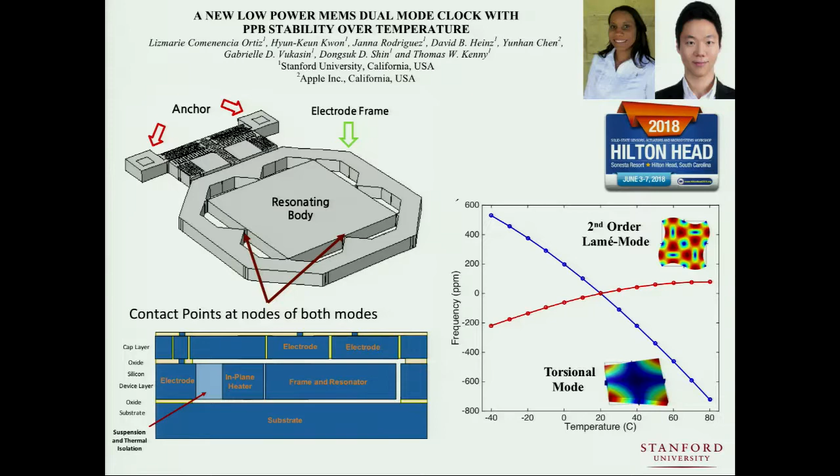We haven't done that test. I think we can probably predict what it will be. You could put a pair of these devices in the same die oriented in opposite directions and get a first order correction for that. Sure. A question on the process, scaling the process further for inertial sensors, pushing towards higher accuracy.

So right now the package pressures are 0.1 to 1 Pascal. Yep. What's limiting going lower than that? If we go lower, you can bake them longer in the nitrogen furnace, pull more hydrogen out. I think in general the problem you'll have is that you're in a world where there's some partial pressure of hydrogen, helium. It's eventually going to get back in unless you're going to build a hermetic, impervious seal around the whole thing. And in some ways that kind of defeats the purpose of going to all this effort in the first place. So the philosophy here is live with what you have. And 1 Pascal to 0.1 Pascal, I think we treat that as a boundary condition.

Sure. And then what's the largest area device that you can build, or project building in this process? It's dominated more by what the cap properties are. So if we build a large chamber, it's basically like a ballroom with no pillars. The roof will sag under static pressure. So we have design rules for putting beams. It's very much like an architect would require. We've built things that are in sort of the 5 to 10 millimeter range. I think it's just a question of how much real estate do we want to waste on a single idea in our process. Yep. Thanks.

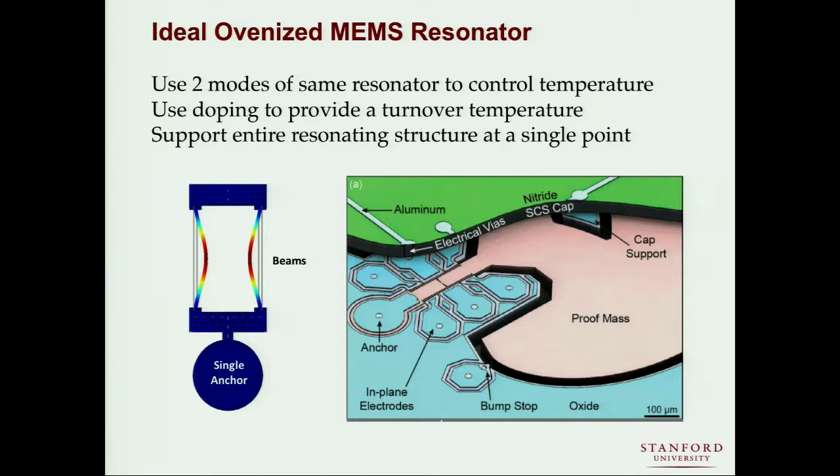And SiTime could talk to this in great detail, but generally let the MEMS people focus on building the great MEMS wafer. Let a company like TSMC or GlobalFoundries build you great CMOS. Focus on design, and then put those together at the end, and you get out of a whole world of multiplicative yield and compromises on technology. So it's doable, but just not really a great idea.